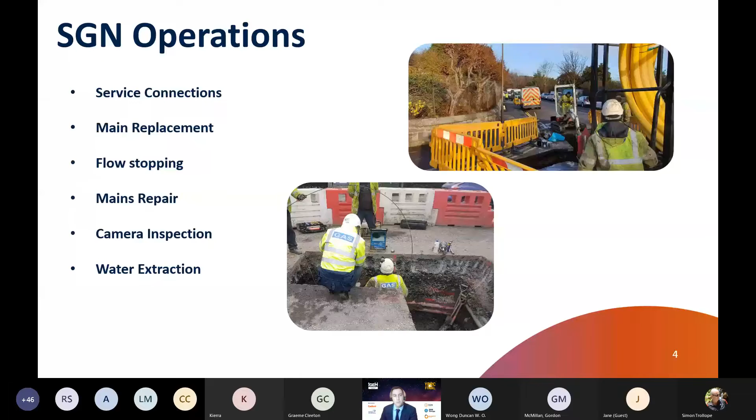Along with this obligation, SGN have targets to carry out replacement of 1,000 kilometres of metallic mains and 20,000 connections each year. What this emphasises really is the large workload that we are required to carry out and the potential disruption that it can have.

The project that I was responsible for aims to reduce this obligation and workload by making our operations more efficient, helping to minimise this disruption to customers.

In some areas this can be achieved by utilising smaller excavations, working efficiently to reduce the time spent on site, which ultimately helps to reduce our carbon footprint and emissions. Really the overarching goal here on the right is focusing on our customers while carrying out our key operations.

SGN are working on ways to reduce this disruption through innovative techniques and projects that allow for more efficient ways of working during activities such as your service connections, your mains replacement, and any repairs.

In projects like iCore, they aim to improve these efficiencies and safety on site by operating in a smaller excavation, such as the circular keyhole shown here on the right image. The project also utilises long-handled tooling for doing operations such as your service connections, which removes the operative from the excavation.

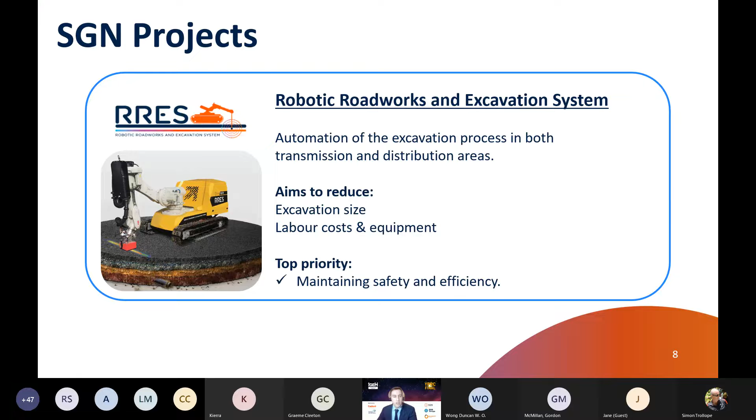Other projects such as the Robotic Roadworks and Excavation System also aim to reduce the site footprint by automating certain operational activities by utilising a robot. Both projects, these examples, aim to maintain safety and efficiency while carrying out our operations.

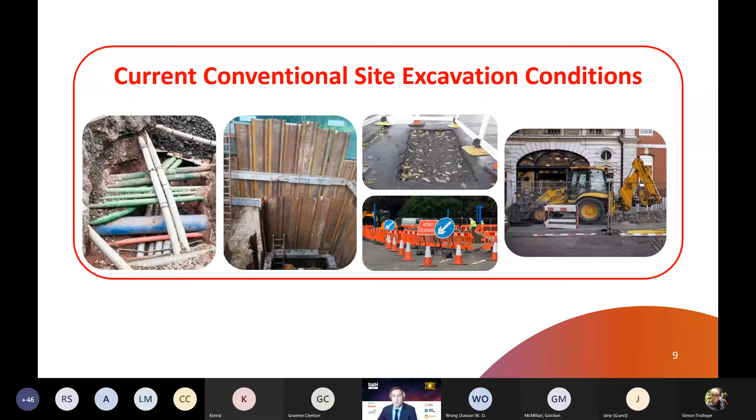This is not an issue seen just within SGN, but something experienced with all the gas, electricity, and other utility companies.

Looking at these innovation projects and techniques, they all aim to make our operations smarter and efficient by using technologies such as your long-handled tooling and utilising keyhole coring, creating a smaller and stronger excavation. One thing that clearly points out is by having no corners with these circular cutouts reduces the stress zones and likelihood of the surface excavation failing.

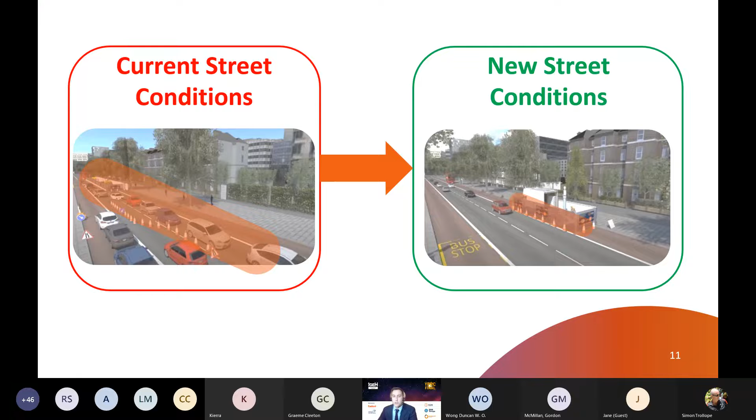In order to increase these efficiencies and reduce the site impact, the burst pack product is used during your main replacement activities when carrying out service connections to reduce the time spent on site and the size of excavation.

To give a quick overview of the service connection operations, the current metallic infrastructure within the utility industries is ageing and requires to be replaced with plastic or polyethylene pipes, or PE pipes, meaning new service connections to each property need to be made.

The first step for the service connection involves inserting your PE pipe through the live or dead metallic main, resulting in a gap or annular space being created between the differences in pipe diameters. Then the metallic main is opened, exposing the PE pipe for your service connections.

Once it's been connected and before the reinstatement can be made, the annular space must be closed. This is to prevent issues such as your soil backfilling into the annular space, which can cause the surface to slump over time, again leading to potholes and further disruption to customers. It's also required from a safety point of view to prevent gas leaks from travelling along this annular space.

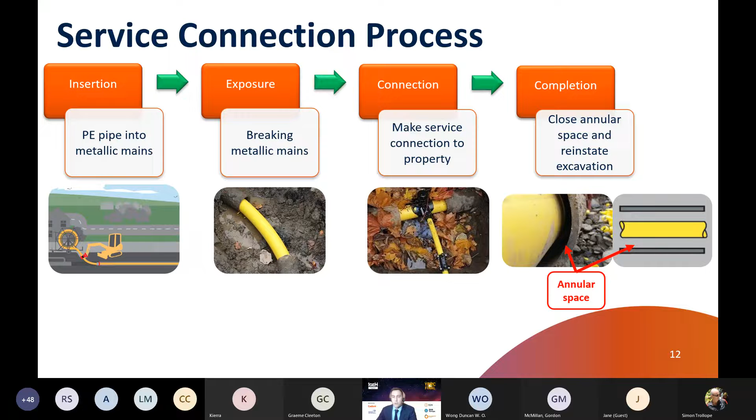The current process of sealing the annular space, typically using a foam mixture, involves preparation, mixing and then applying, whereas it is an expensive and overcomplicated process.

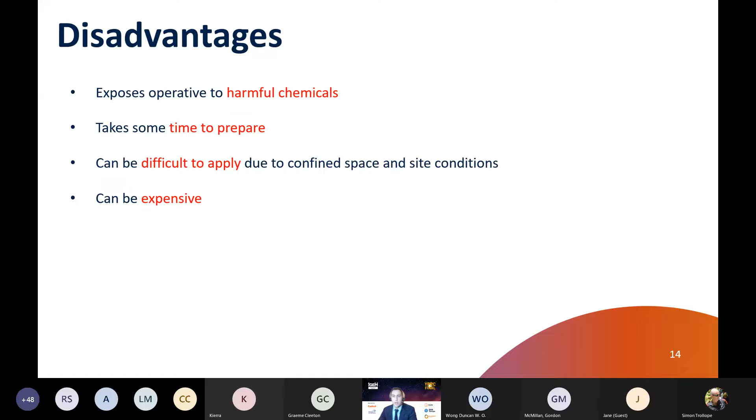So by identifying these issues with the current method, I was able to set a project problem statement here, agreeing to develop a new, safer, reduced cost and simpler method of closing the annular space.

A list of project requirements were also made with input from the operations team, such as being user-friendly, safe to handle, and at a suitable cost.

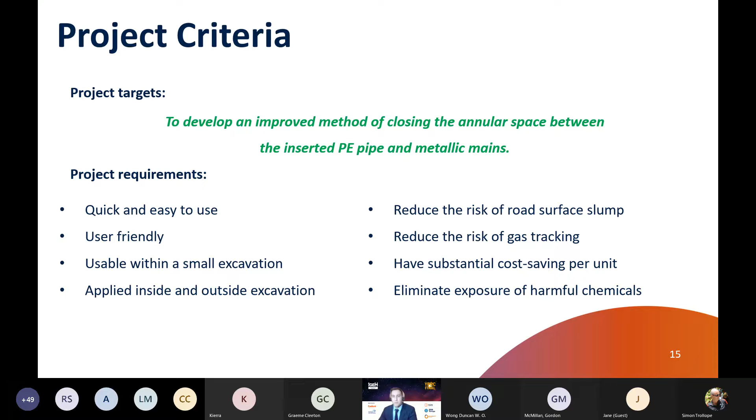At the start of the project, I attended the site with the field operatives to gain an understanding of the operations and the problems faced, as well as getting their input into the project.

I then gained an understanding of the required policies, such as SGN's mains and service laying procedures, and also industry standards such as the gas industry standards GIS LC 14, which is a specification for annular gap sealants.

So by doing this, I was able to develop a product that met both current processes and standards.

We focus these designs to be used on 1, 4, 6 and 8 inch pipelines. The user follows the same steps as before for preparing and mixing before applying by hand or long handled tooling in or outside the excavation.

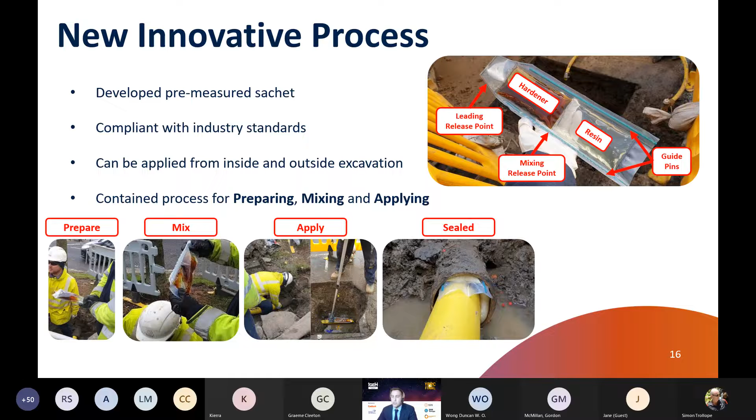Comparing this to the existing method, it's a more user-friendly design, making it safer to handle. It can be applied from outside the excavation, again making it safer by removing the operative from the excavation.

It can be applied in a reduced time, with the whole operation taking just a few minutes compared to around 20 to 30 minutes with other methods. And again, both sides of the metallic main must be applied per excavation, so you're looking at up to about an hour saving.

As mentioned earlier, the project was in partnership with Steve Vick International, who are the experts in this foam technology and helped design and develop the product.

The project lasted 12 months and was funded through Ofgem's Network Innovation Allowance funding incentive, and I'll go over this in a bit more detail towards the end of the presentation.

But the project followed the Technology Readiness Level, or TRL, scaling shown here, where earlier TRL levels of research were carried out by the project partner before we started.

So we started the project at TRL 4 and ended on 9, with focus on technology development, demonstration, and then testing and implementation, all shown by the images here on the slide.

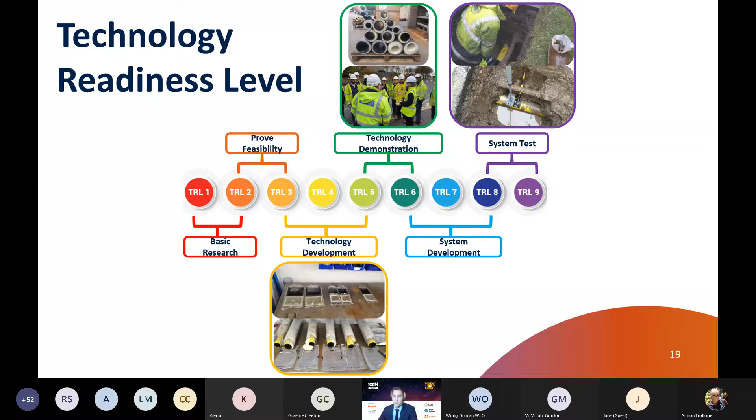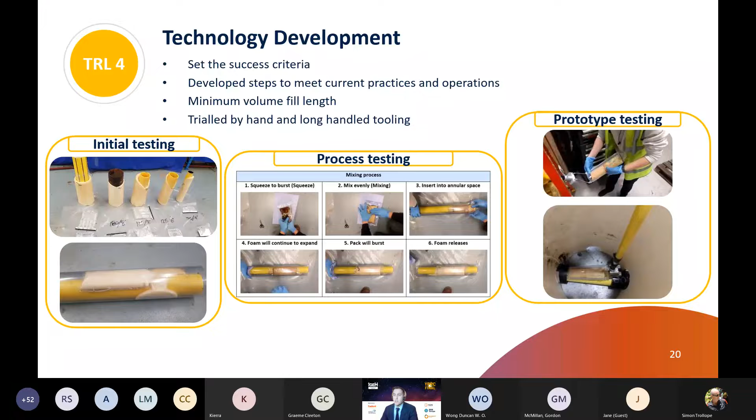So the first stage under TRL 4, technology development, involved gaining an appreciation of the task in hand and carrying out some initial tests. A few modifications were then made to find the best burst pack design that successfully met the project requirements and the problem statement outlined earlier.

Under TRL 6 demonstrations, we took the prototypes out to site to get input from the operations team, for both by hand and by long-handled tooling demonstration, where I created the appropriate documentation, such as SGN testing and risk assessments documentation for using prototypes on site.

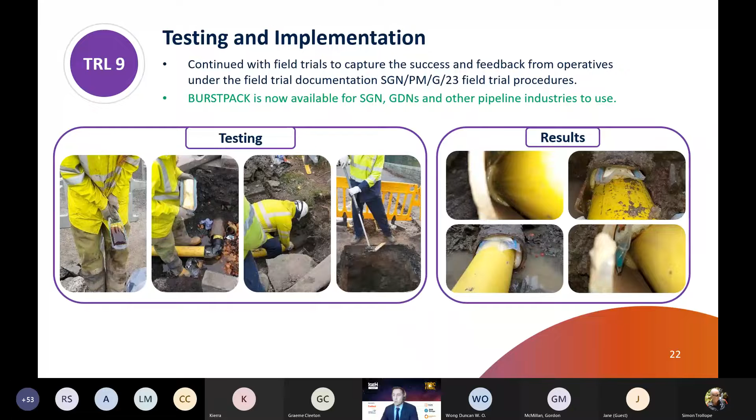After gaining feedback from the operatives, the final phase, TRL 9, involved testing of the burst pack on live operations under SGN policy documents, including the G23 document listed here, and also recording the output. Overall, the testing was all a success, with all annular spaces being sealed, as shown in the results section. The final section to this phase involved implementation, where the burst pack has now been rolled out to the wider industry by the project partners at Steve Vick International.

Feedback in general was very positive from the operatives, but they could clearly see how this addressed the problem of conventional methods, and were actually very enthusiastic about using it and getting their hands on it, because they found it was really easy to use.

Just to summarise again with this slide taken from earlier on, the project achieved the project problem statement outlined at the start, as well as the project requirements listed here, by creating a more efficient and safer system.

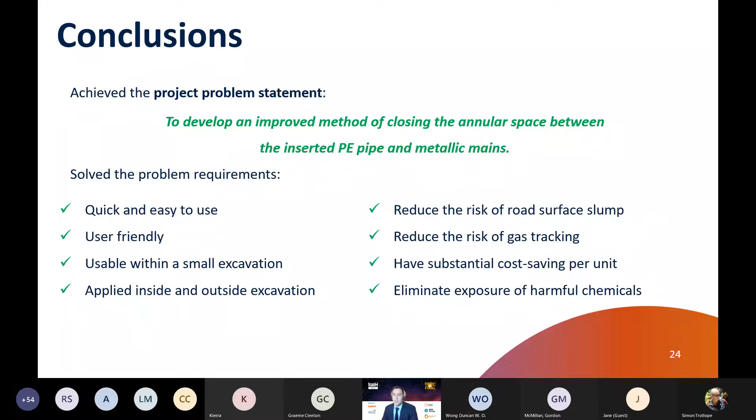So just reflecting back on the project and the skills and roles that I had to take on, and also the ones that I developed, it gave me a greater appreciation of the operational activities, in particular areas such as safety. I was also able to demonstrate project management skills, from doing admin tasks to qualifying procedures and policies, as well as evidencing the benefits and outcomes. I developed my communication skills by interacting with other disciplines internally and at Steve Vick International, and also leadership skills from steering the project and managing teams during the design and testing stage.

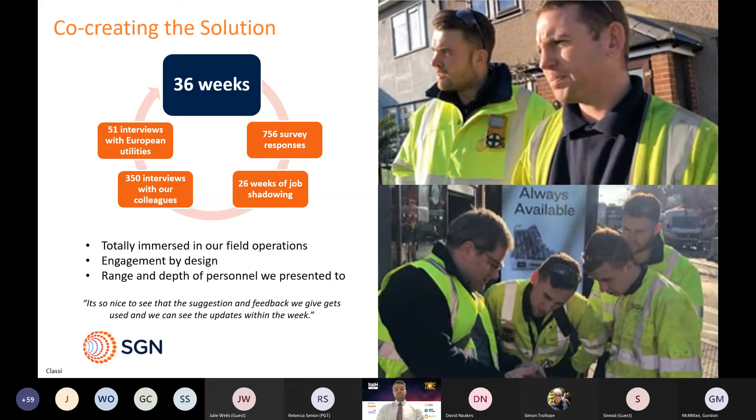So what did we build? Well, we built FYLD. FYLD is a digital application that transforms the day-to-day lives of both field engineers and managers. It allows team leaders to capture data effortlessly, giving their managers real-time visibility of site activities and actionable insights to that job. Rather than digitising a process, it's transformed it. We haven't just simply digitised the risk assessment, we've transformed it into being the initiating factor to a job that gives so many insights to a manager's day, but also support to the team.

We're using the latest technology like voice recognition systems and a machine learning algorithm that allows us to learn and predict when certain things are going to happen and informs us on similar behaviour, which I'd love to answer more questions on later. But what FYLD really does is allow our managers to make data-driven decisions in real time, to act on things before things go wrong or before an accident occurs.

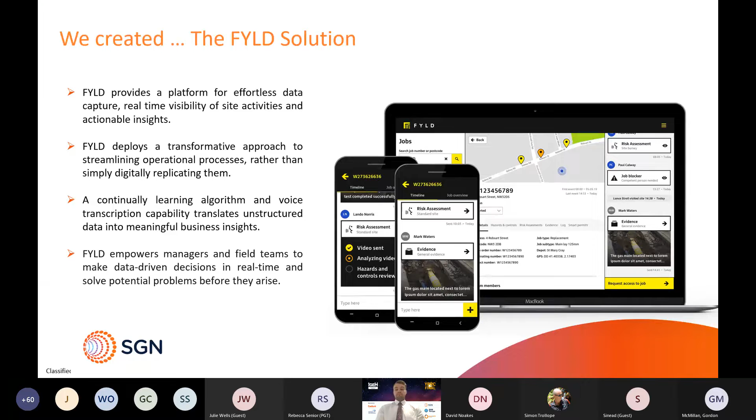I'll give you a bit of an insight into how we built it. So we leaned into that behaviour called WhatsApp, and we started with risk assessment. Because as a safety professional, I'm not having risk assessment seen as a tick box exercise, I asked the team to stop doing the paperwork, gave them a phone, and said go on WhatsApp and video your risk assessment.

And it was a bit of a shock for the team, as you can imagine. But what that allowed me to do was understand how they would articulate a risk assessment. I would then sit, look at the video, type in the hazards and controls, and send it back to them to ask if I captured their risks and hazards appropriately. And that was the basis of our application.

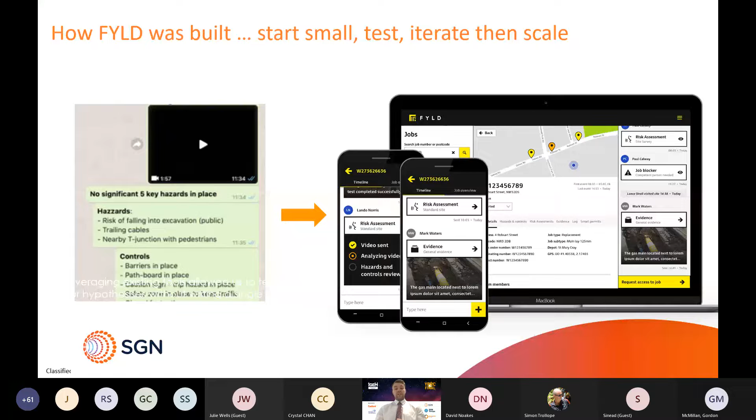So that's an example of a lean test we did with the 4 team leaders I chose and the team manager working on that experiment. That allowed us to understand what insights this gives the team manager, and what insights it gives us as a safety team, as a policy team. So not only can we understand the policy gaps, but also where we need training, the change management strategy, and support for the teams to make better quality videos.

So where did I lead? I'll talk about COVID in a moment, but stakeholders was where I had the fun, and what I want to call out today. I had the opportunity to present the case to our shareholders, which is like going into the dragon's den, to be honest, which is a rare occurrence. Some of our exec don't even get to go and present there. And I was asked to present the case of why they should invest in the product we were building.

And the benefits it would give. So I could voice the concerns of the workforce and the challenges they faced, but I could also speak from experience. And I could articulate that in such a way that spoke to the seniority of how the business would benefit from this application. It was a great defining moment and gave me a great confidence boost for the rest of the project, as I had to present to them again thereafter. But I was going there for the vision I had, and fulfilled, but also for the impact it'd have on my colleagues on the front line.

The other set of stakeholders I want to mention, that some of you in the audience would know all too well, is the HSE. Because we were encroaching on something as fundamental as risk assessment, I wanted to make sure they were brought along for the journey. So I spoke to my local inspector to say, look, I want to present you what we're working on.

And he asked me to present to his executive team at the HSE and the principal inspector, because they themselves were setting their own strategy about how they were going to keep pace with emerging technologies from a regulation perspective. And for those of you that know the HSE, they're not going to ever say that you're 100% right or doing things perfectly, but they will definitely say things if you're off piste.

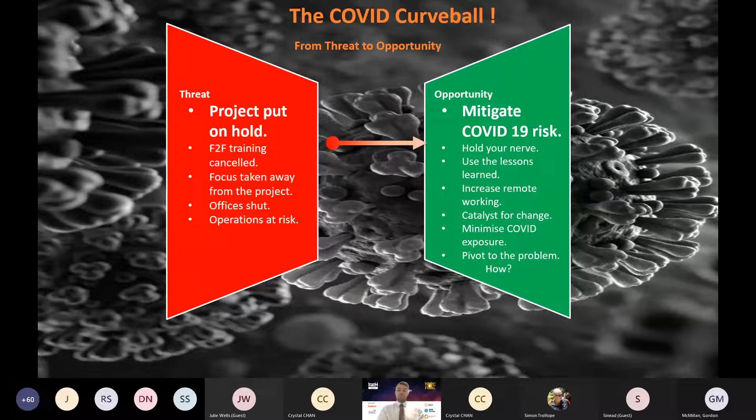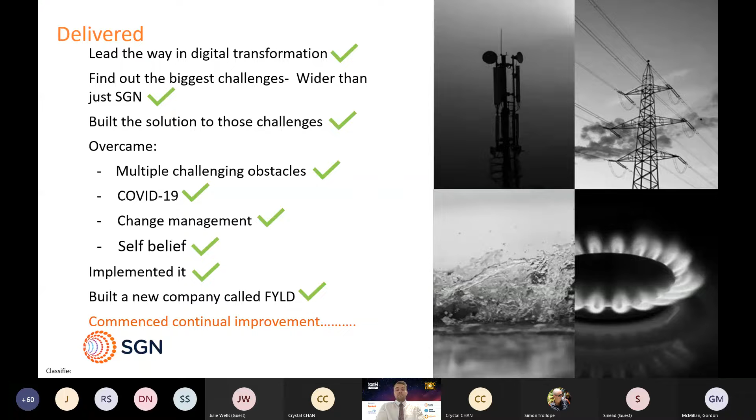What did I deliver? Absolutely leading the way in digital transformation. Built benefits wider than just SGN. We overcame those challenges from the workforce and team manager's perspective. I overcame multiple challenges — COVID-19, change management, self-belief that I had in myself. We implemented it, and not only that, we've built a company out of it that's launching to other utilities around the world, allowing us to commence on this cycle of continual improvement.

So I started off my presentation asking what it takes to drive digital transformation, and talked about all those benefits. It takes collaboration, it takes working differently, and certainly thinking differently. I just want to leave you with what I've written in my paper about what I believe is the critical factor to digital transformation. And it's easy — it's your greatest asset, which is your people.

Our leadership team absolutely believed in our people, by believing in me, and me believing in our workforce. And know that if you can get the buy-in, if you can get the vision and the desire to change, with the right tool to enable it, your workforce will transform your business and lead to all of those beneficial gains. FYLD has been built by the workforce for the workforce.

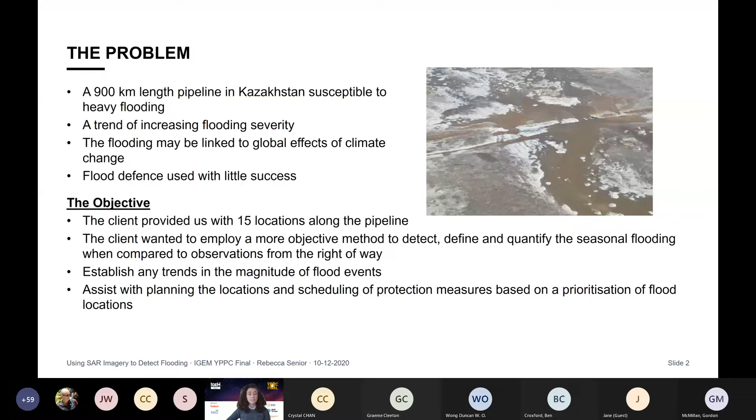The objective of this project was to employ a method that could be used to detect, define and quantify seasonal flooding and establish any trends in the magnitude of flooding events. This would ultimately assist with the planning of locations and scheduling of protection methods. The method used to satisfy the objective was SAR imagery, as the title states, and I'll go into more detail later about SAR - this is a radio wave technique used to measure the backscatter and reflectivity of objects on the ground.

So why is flooding a problem? Flooding can threaten the integrity of a pipeline and any associated infrastructure. I've listed a few hazards here, such as scour, erosion, and encroachment on the pipeline, and these are just a few of the ways the pipeline can be affected. As we can see in the aerial imagery on the right of the screen, this shows the damage to a bridge and right-of-way access road. This pipeline runs parallel to this road and is situated just north of it, so any damage that has happened to the road by flooding means that water has already crossed the pipeline.

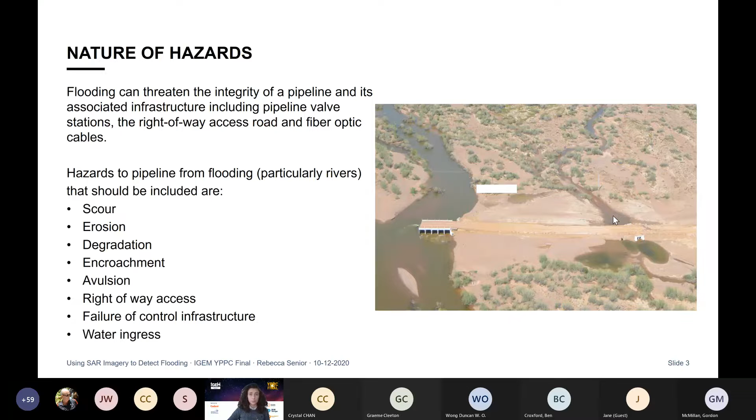This exposed pipeline can then be partially reburied by sediment, and this can potentially cause failure. Exposure also makes the pipeline more vulnerable to third-party damage.

This project was split into 3 main tasks, and all of the work I'm going to discuss is work that I carried out. The first task was a data review, the second was flood monitoring and reporting, and the third involved a 90-page final technical report containing evaluation of the pipeline and recommendations.

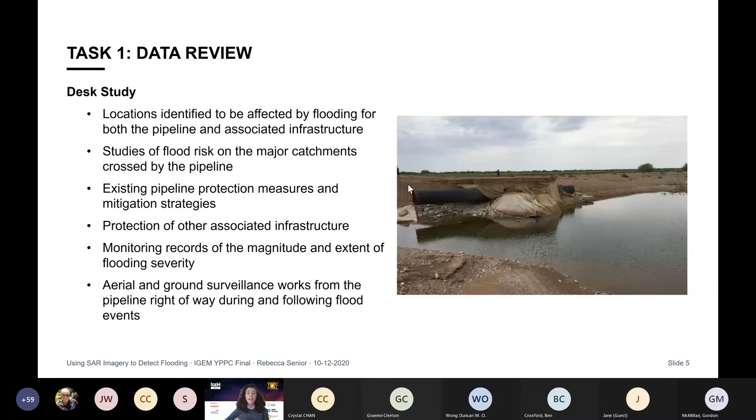This included photos that had been taken along the right-of-way, and the image shown on the right of the slide here shows damage to a right-of-way access road and culvert. From task 1, I wrote a technical report where I provided an overview of the pipeline and any additional data required to complete task 2 and task 3.

To fully introduce what SAR imagery is now, this was the start of task 2, where I began to look into ways of performing the analysis. As I mentioned, SAR is a radio wave used to measure the backscatter and reflectivity of objects on the ground.

The European Space Agency, the ESA, allows SAR imagery to be obtained free of charge, and the satellites have a retrieval occurrence of between 6 and 12 days. So you know that the data you're receiving is recent in comparison with other data. It also has the benefit of being retrievable regardless of time of day or weather.

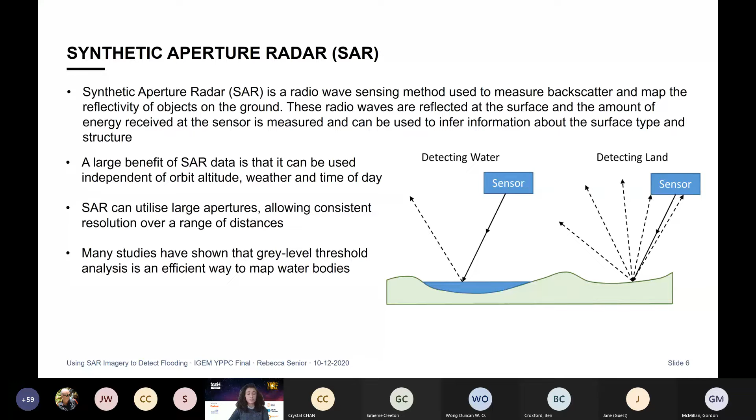The solution was to employ SAR imagery and remote sensing techniques to detect flooding along the pipeline right of way. Water has a low backscatter and wavelength measured by SAR, and this allowed me to map the water bodies.

This then leads me to task 2 of the project, and this was arguably the largest part of the project as it was split up into 4 different steps. It was all a learning experience as I didn't know how to do this analysis beforehand.

The first step was the development of remote sensing methods. This included doing research and reading journals to develop a methodology for the outcome the client wanted. Step 2 was then applying these remote sensing methods and learning how to use new software that would allow me to analyze large satellite data sets.

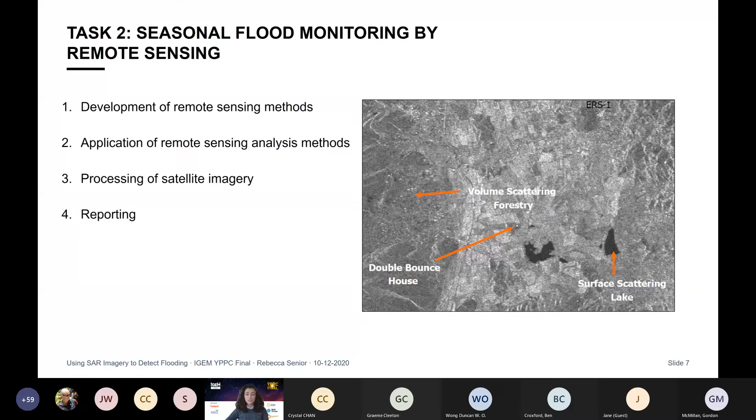The third step was then to actually process the satellite imagery, starting with a raw data image to produce a vector plot that could be viewed in ArcGIS. The final step was the reporting stage, where a total of 8 reports were produced for 24 flood areas.

The SAR imagery was analysed in an application called SNAP, which is provided free by the ESA, and the data used was obtained from Sentinel-1A and 1B satellites. I used a model builder to develop an optimum analytical process, and this contains many rigorous pre-processing techniques.

I'll now show you what a raw and processed plot looks like. This is a raw SAR image on the left of the screen, displaying the section of pipe in red. On the right-hand side, we have a fully processed vector plot, which has gone through the steps shown in the previous slide, and you can see the flooding in blue affecting the right-of-way.

As you can see in the image on the right, there's a build-up of floodwater against the pipeline embankment and a breach of the right-of-way access road. At this location, a culvert was destroyed, which put a lot of pressure on the embankment where the pipeline is, and this can cause loading.

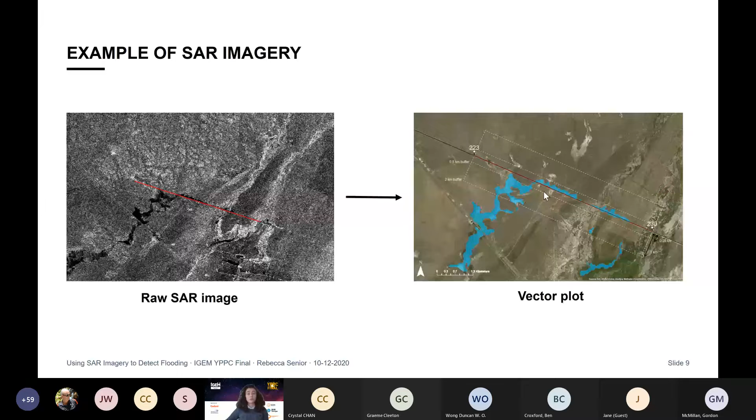An assessment criteria was then developed to be able to quantitatively measure the flooding surrounding the pipeline. Criterion 1 measures the length of flooding along the pipeline, which is the most important and the one the client was most interested in. Criterion 2 shows the flooding within a 0.5 kilometre area, and criterion 3 shows the flooding within a 2 kilometre wide area.

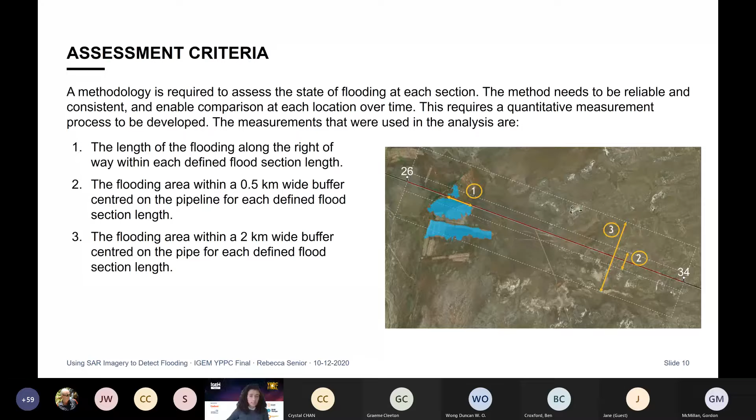The main reason for using this quantitative approach was that when the analysis is performed again next year, or if you wanted to look at it historically, this approach means it can then be compared.

A total of 192 maps were produced during this task. This leads me to task 3, which was a technical report to summarise the findings from task 2 and an evaluation of each section individually. The report included determining the peak flood at each location, recommendations on how to protect the pipeline from hazards present, a review of embankment design, and current flood defence measures. So task 3 considered and evaluated the task 2 results and provided recommendations for the client, basically saying: here are your problem areas and how they can be solved or mitigated.

I've identified a few different ways in which I would improve this process. Firstly, I'd use commercial data, as this would increase the survey frequency. Flooding can rise and fall very quickly, and for a big event you would expect maybe around a 3-week timeline. So once you identify when the peak flood is, you can analyse SAR imagery every 3 days, for example, and this will result in a clearly defined flood development and recession curve that identifies the date of flood onset and time to maximum flood.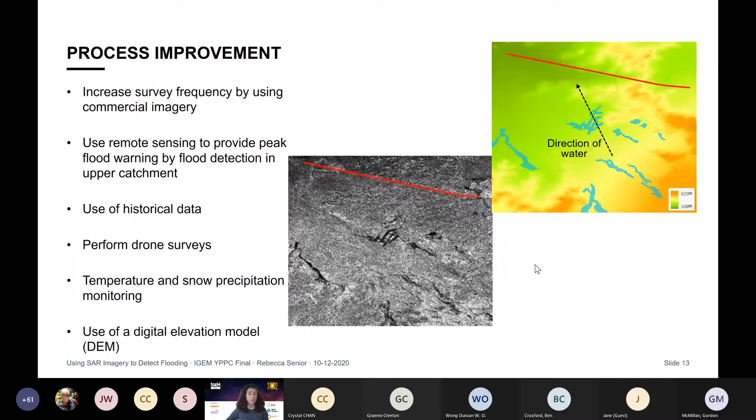Some of the further work and recommendations to the client is to perform a yearly review of flooding along this pipeline and along another one of the operator's pipelines, which I'll be completing next year. It's also recommended that the condition of the pipeline be assessed from the inline inspection data to determine whether there's been any loading introduced due to the passage of floodwater, and if the pipeline had suffered displacement as a result.

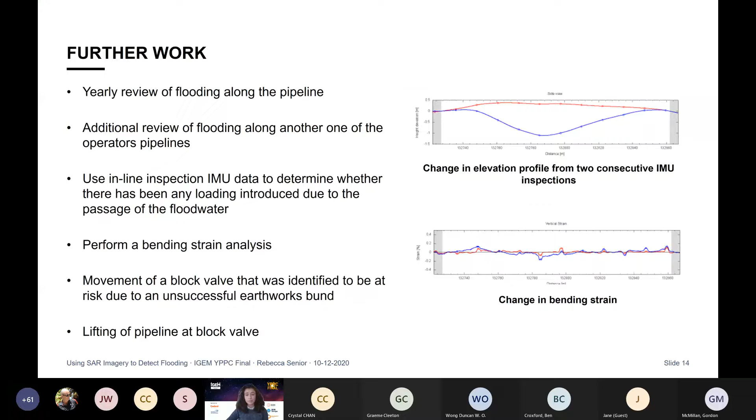So what was achieved? Well, during the project, a proven methodology has been developed to identify flooding from satellite imagery using remote sensing methods. Ultimately, the client was happy with the findings and solutions provided in all 3 tasks. The works allowed the operator to have a better understanding of flooding across the pipeline and significantly reduce the risk of a flooding event at any given location, due to the scheduling and protection measures being implemented based on this risk prioritization.

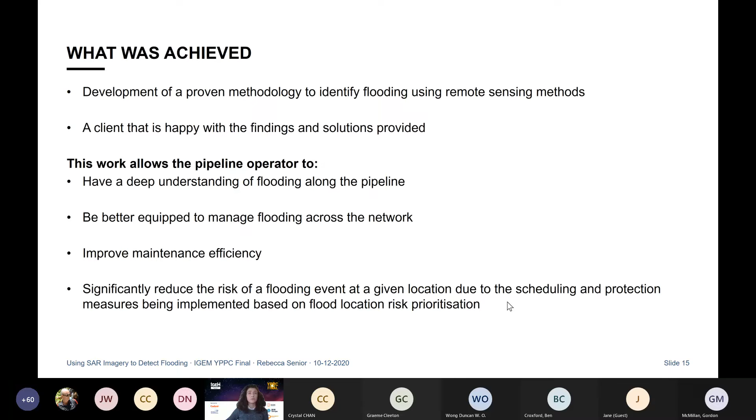In terms of personal achievement, I really enjoyed this project. It was a large project that I was lucky enough to have a lot of input over, and I completed it shortly after graduating, so I feel like this has tested a lot of the skills I've learned at university, and I've been able to apply these and provide solutions and continue to improve and develop as an engineer. So what does this mean for the gas industry? Well, a new methodology has been developed, and this can apply to many networks globally. For example, the method could be applied to any UK network, and this will be particularly important in upcoming years with the growing concern of climate change.

As I'm sure you're all aware, flooding can be an issue globally and can impact assets, including damage to pipelines, particularly exposed crossings and above ground installations, which can ultimately result in loss of supply and generating operational issues and additional expense. Remote sensing has a number of advantages, including data collection from remote or difficult to access areas, particularly with the ongoing COVID-19 crisis.

As satellite imagery improves and becomes more easily accessible, the flooding work could be expanded to improve remote sensing techniques in the pipeline industry. This could be used as a geotechnical review of a network to identify and prioritize locations under threat, allowing prioritization to be desk-based and determine a top, say 1 to 5%, of the network that would then need to be investigated in field.

This includes specific geohazards such as landslide monitoring. For example, if there was a land instability and a heavy rainfall event occurred, by using SAR and InSAR imagery, which combines two SAR images, this can be used to determine changes in land surface. You can then compare these images before and after the event and determine whether monitoring or further investigation needs to take place, and link this to the movement of the landslide mechanism and how this will affect the pipeline. This is something I'm looking at currently in my MSc dissertation.

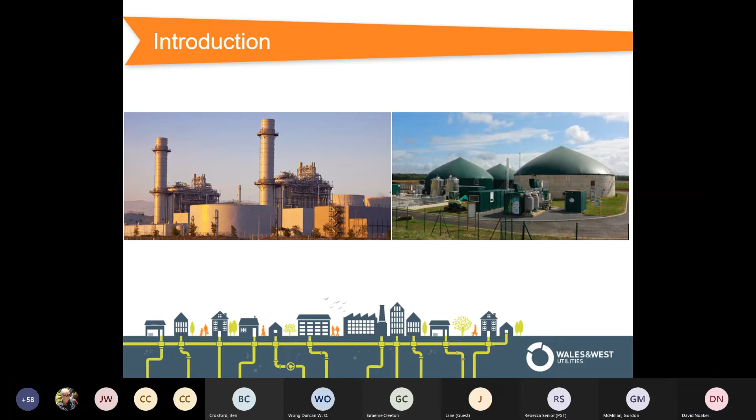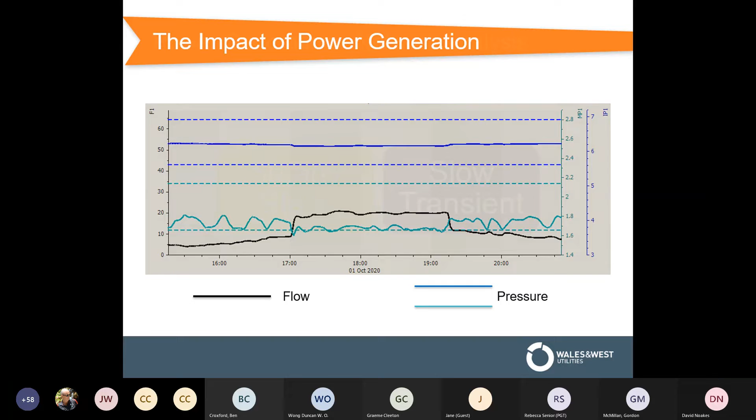Generally, for analysis requests, we have two modes of analysis. Steady state analysis, which we use on our below 7 bar models to determine whether the new load is acceptable during peak demand. And also slow transient analysis, which we use on our above 7 bar models, just to check whether our storage capabilities are sufficient to meet this new demand.

Just a quick note on this, power generation has also had a big effect on our storage, to the point where systems which previously had a huge surplus in storage are now in deficit or close to being. So we introduced a peak day percentage NExA to ensure these sites can operate normally, but only to a specified demand level. Once past this level, the site must run at a flat rate to avoid storage issues. Going back to our processes then, a major change in the way in which we conduct analysis for these fast ramping power gen sites is the introduction of fast transient analysis.

This type of analysis allows us to examine the ramp rates of power gen sites more closely as they switch on and off.

So what do we need to conduct fast transient analysis? Just a couple of pieces of information from the customer is needed, aside from the hourly flow. Firstly, the gas meter or site location, so we can determine the distance between the connection point and the site, and in turn work out the new main and service lengths. The toolbox program is then used to calculate the minimum allowable diameter of the pipes leading to the connection point, from the connection point to the site. Using toolbox ensures that

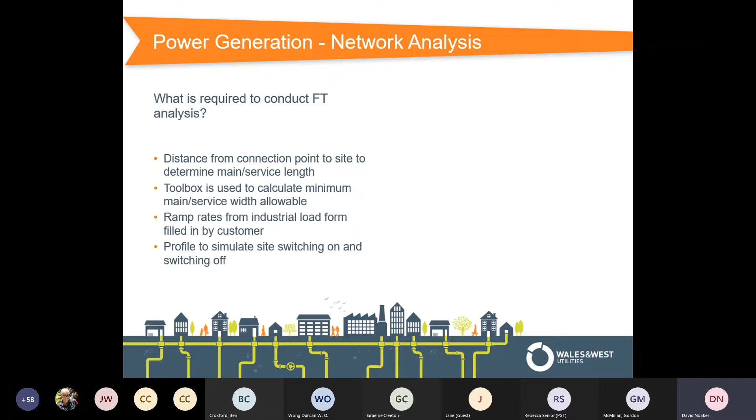Lastly, what we need from the customer is the ramp rate of the site, which is given to us via an industrial load form. From this, we can create a profile to simulate the site switching on and switching off. This is just a snippet of our SynerGEE model, just to show you how the site will look as it's set up on SynerGEE just before its fast transient run.

We are looking to ensure there are no pressure spikes during these two scenarios that take the pressure over or below the allowable limits of the upstream network. To ensure we are fully covered for all scenarios, we use this profile both at peak demand and at summer night demand, which we analyze at 5% temperature sensitive and 30% industrial demand. We do this because pressures are higher in the summer, and therefore we need to see if the pressure spikes above the peak level operating limit of the network during an emergency switch off.

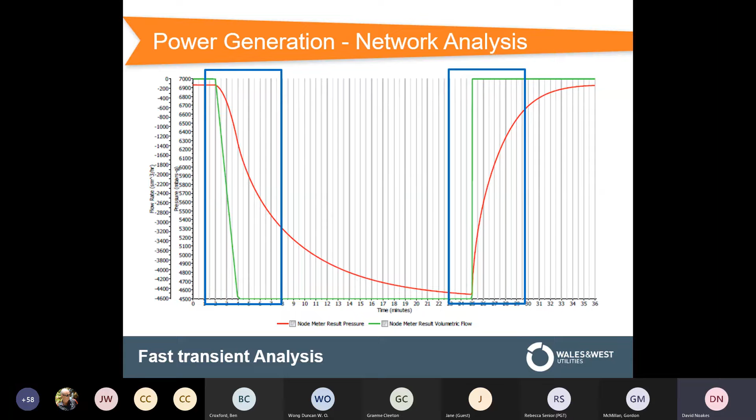Turning our heads to biomethane now, the impact of biomethane. Whereas for most inquiries, we are interested in what happens during peak demand, for biomethane requests, we are looking to see how the biomethane site reacts during low demand periods and if they can export their requested amount all year long. In an ideal world, the biosite would be able to run at a continuous flat rate without any disruption. However, this is not always the case.

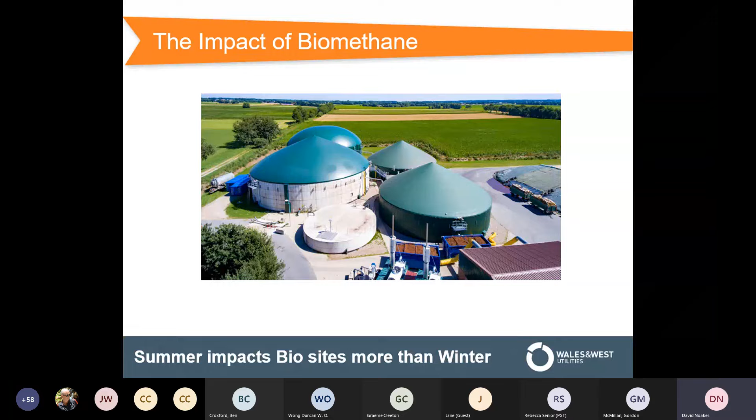So what do we need to conduct our biomethane analysis? Similarly with the power gen, we need to know the distance from the site to the nearest connection point on our network. We can then again work out from this the size of the new main, which with the help of the toolbox program, and lastly, we just need the requested export amount from the customer via an application form.

Let's have a look at an example then using our actual flow data from our SCADA system. Say if the customer wanted to export 500 standard cubic meters of biomethane into our network, then it would not be possible during low demand periods.

However, it's not just as simple as just looking at actual flow data and making a call on how much the customer can export. There could be more than one site feeding into the same network, and also we don't know how the biosite will react with the other feeds once it has connected.

That is why I use modeled data and flow data together to come up with a true export rate. The way we do this is by sticking the biosite onto the model, like I showed you on the previous slide, switch it on pressure control at the MOP of the system, and scale the model down in increments as shown here on the next slide.

This is just an example of the increments used, but you can use as many as you like. The industrial scale does not match the non-industrials, just because in reality, the industrials wouldn't see the same proportional decrease in demand the same way as a house or flat does.

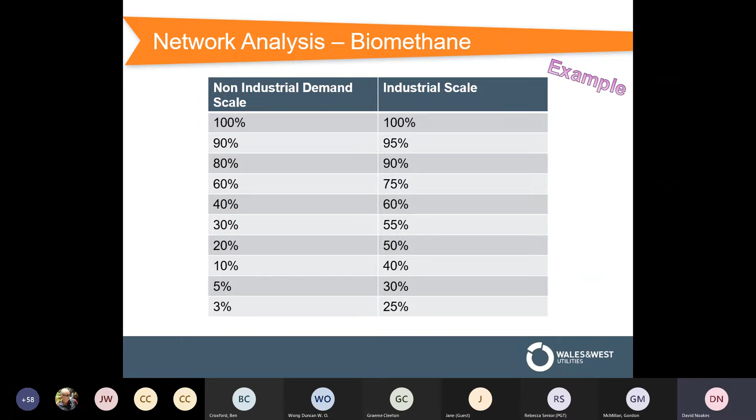We can then incorporate this into our flow data to show us exactly what the biosite would have been doing if it had been connected for the past year. This, of course, is just a snippet of the results and not the entire story, but we are interested in the available capacity column, which shows us basically every hour's data for the past year and shows us how the site would have reacted. These results can then produce the following graphs, which then go into the design study, which is sent to the customer.

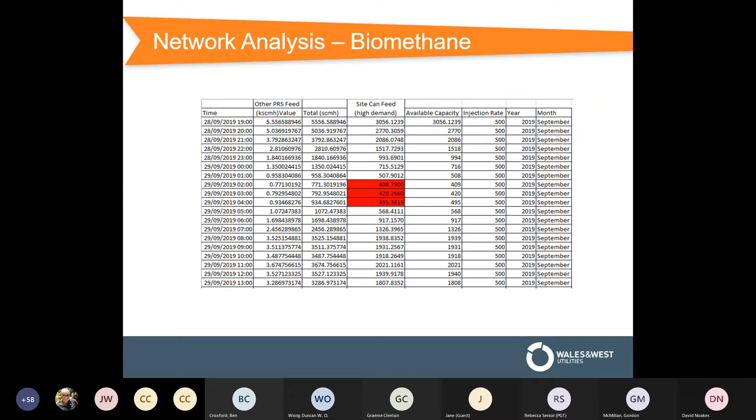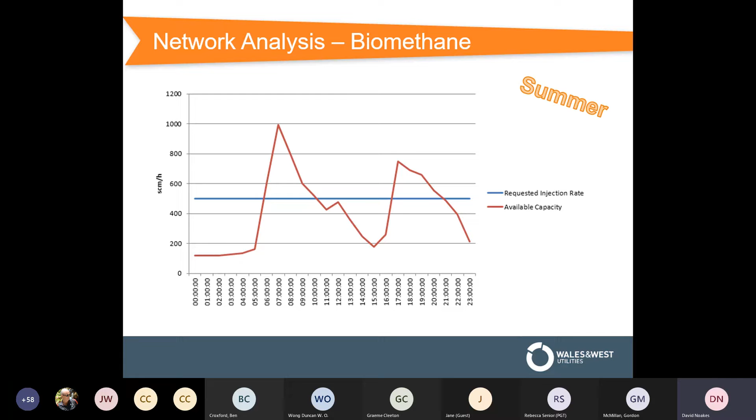All of these amounts are broken down in a capacity study for the customer to see how the results were obtained. Once the site is connected, we will continue to monitor the site to ensure that the analysis we have conducted is working as predicted. And although this presentation talks about biomethane analysis, this could actually be extended to green gas inquiries in general, as the same logic still applies.

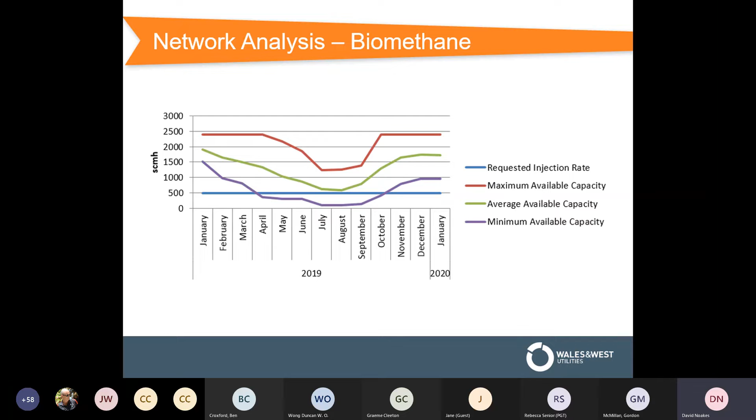Looking to the future, whilst we are always looking to improve our power gen and biomethane analysis and share our best practices, we're always looking further ahead to be ahead of the game. With the 2050 net zero target, Wales and West Utilities and the gas industry as a whole needs to adapt and contribute towards this goal. One way we can do this, along with the predicted uptake in biomethane, is the introduction of hydrogen. Hydrogen blending will provide a huge challenge for analysis, and it's vitally important that we are satisfied with the results and ensure all scenarios are covered before implementation.

If, as I mentioned before, we're expecting to see an increase in the amount of biomethane sites, then we will need to look into ways to help green gas export into our network. One of the ways being explored is through the OptiNet project, which Wales and West have been working on alongside Cadent and PassivSystems. The purpose of this project is to explore different ways to optimize gas network applications, such as smart pressure control, compression to higher pressure tiers, and storage solutions at times of low demand. The smart pressure control trial is currently being set up on the Wales and West network, and if successful, it could then be implemented elsewhere.

Finally, another branch of analysis we've not experienced before until recently is unregulated demand. Since this demand is unregulated, the site will take gas depending on what the network pressure is at the time. We've already consulted with customers and other DNs across the UK to workshop the analysis process for this type of request. It's expected we'll get more of these inquiries, so it's important to shore up our processes early.

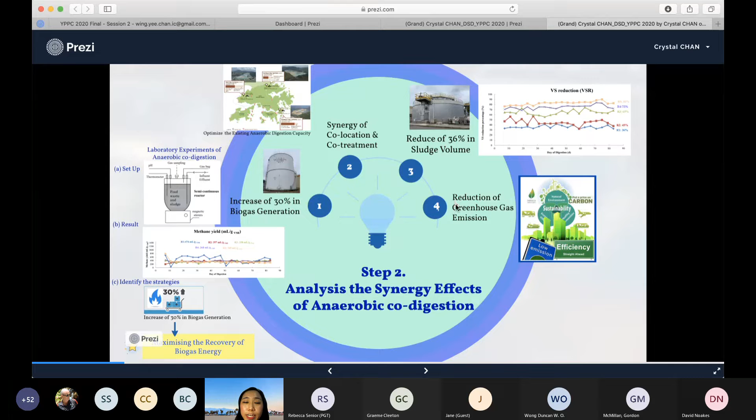Therefore, feasibility studies of anaerobic co-digestion by the DSD at the laboratory test have been carried out, and the results show a synergy effect of a significant increase of 30% of biogas. In these studies, we are going to identify strategies to maximize the recovery of biogas energy. Apart from the 30% increase in biogas generation, synergies of co-location as well as co-treatment, reductions in sludge volume, and greenhouse gas emissions are the major advantages of using anaerobic co-digestion.

The third step is that we need to understand the current situation about biogas usage. To enhance biogas utilization, the Drainage Services Department is currently using combined heat and power as well as microturbines to generate electricity as well as heat. From our study, we found there is a major problem because of the low utilization of thermal efficiency.

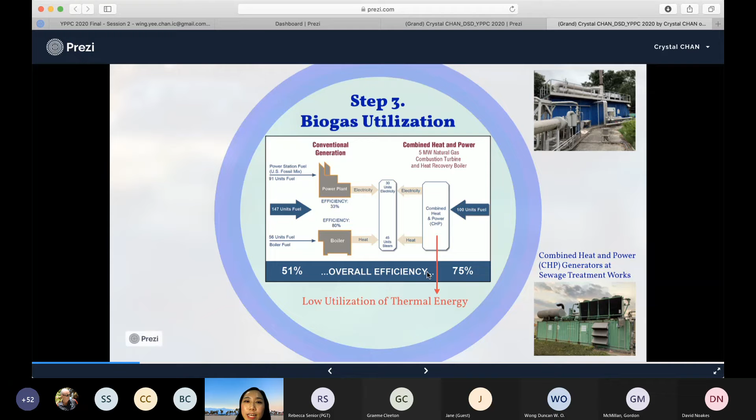So that's why we come to our main part, which is that we need to construct a very strategic framework for biogas utilization. In order to enhance biogas utilization and the economic performance of the CHP system, I propose a strategic framework for conducting a study to identify improvements as well as explore other feasible solutions.

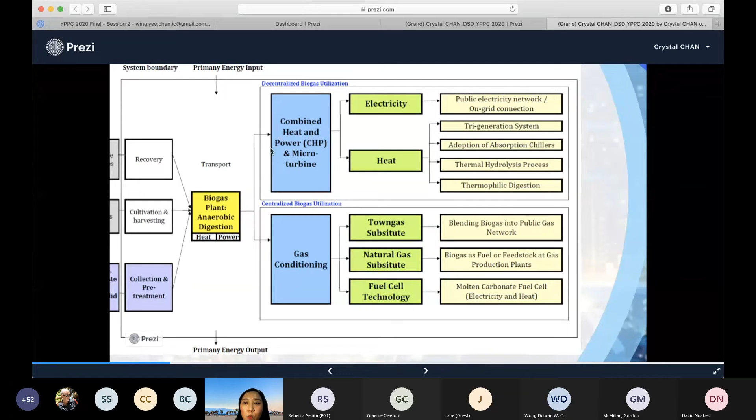Combined heat and power microturbine is the first strategy, while the second one is gas conditioning. So we'll go through them one by one. In terms of combined heat and power as well as microturbine, electricity efficiency as well as thermal efficiency will come up with the total energy efficiency.

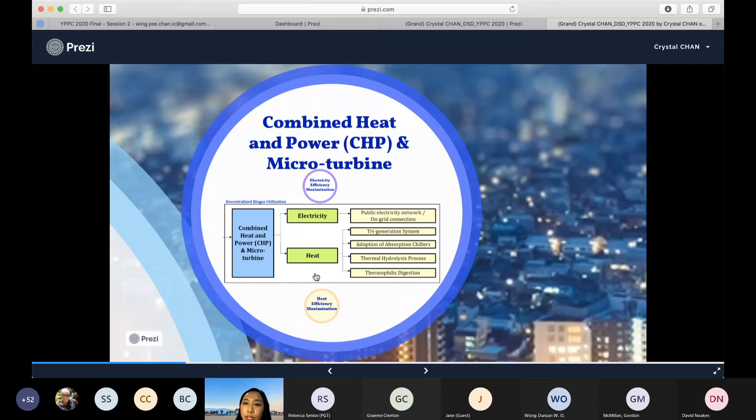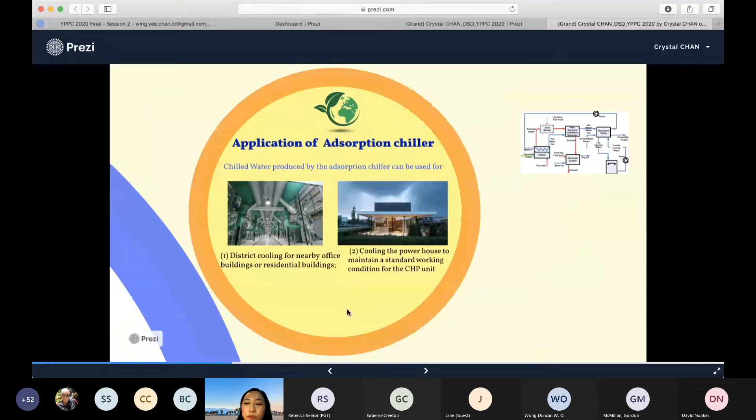In order to enhance heat efficiency maximization, we need to construct this using two methods. The first one is about trigeneration and the adoption of an absorption chiller. In order to enhance biogas utilization efficiency as well as balance the thermal load, we have applied a retrofitting scheme to the existing trigeneration system.

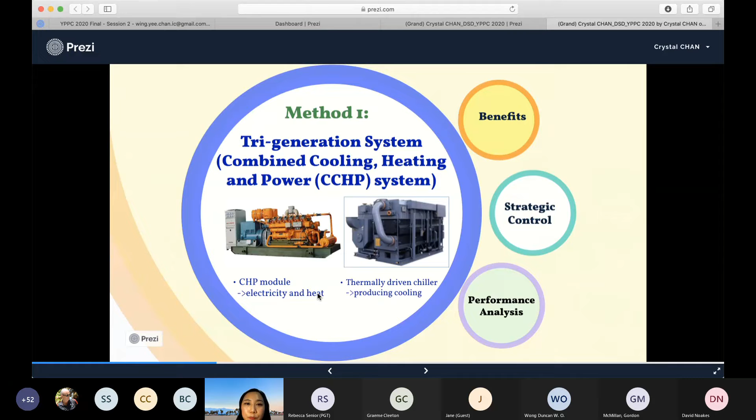You may wonder what trigeneration is. Indeed, it is a combination of CHP modules as well as thermal-driven chillers, named the combined cooling, heating, and power system. Energy saving as well as emissions reduction are the main benefits of the trigeneration system.

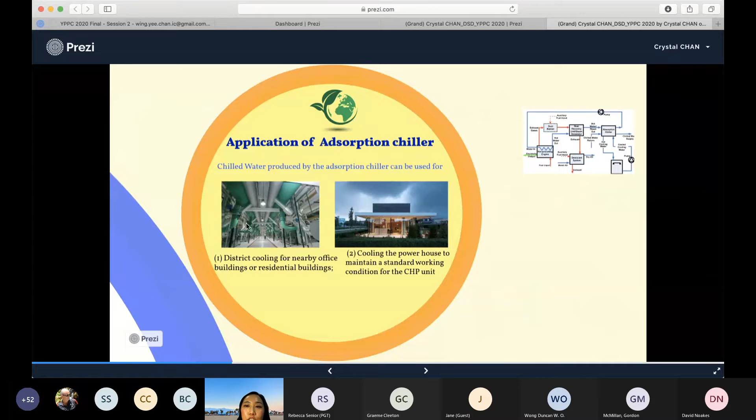The chilled water produced can be used for the district cooling system, or it can supply the powerhouse for cooling. To satisfy different cooling as well as heating demands in different sections, strategic controls of trigeneration are adopted for capturing thermal energy from the CHP.

For example, in summer, chilled water is used to cool the exhaust gas as well as the jacket hot water, while in winter, digester heating is given high priority, and surplus wastewater is used for cooling. So in this kind of study, we learn not just the technical side, but also the project management side, which can benefit both aspects.

And here comes the performance analysis.

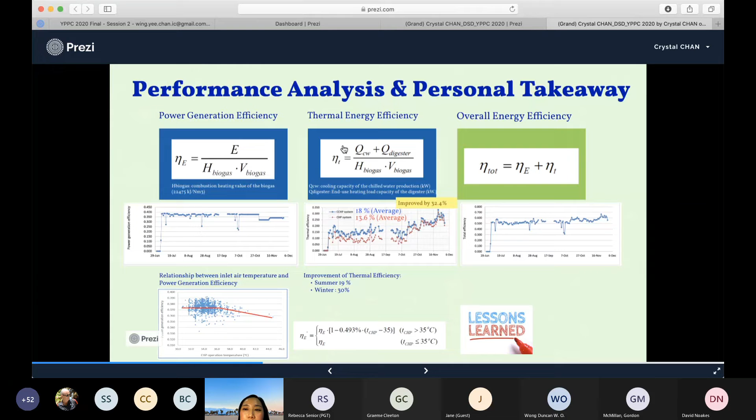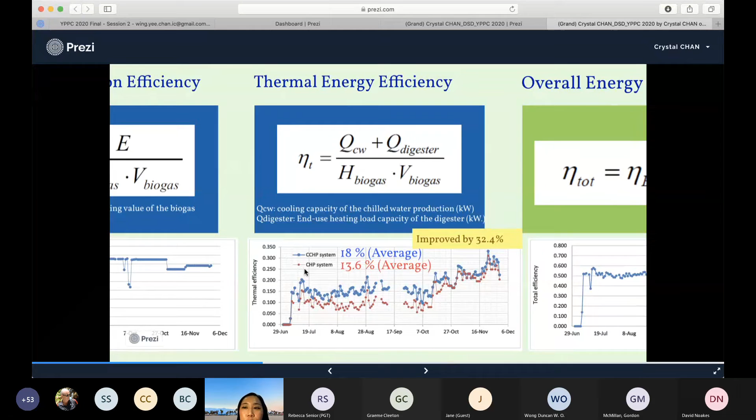The result shows that the overall energy efficiency is equal to the power generation efficiency plus the thermal energy efficiency. From the study result, we can show that the combined cooling, heat and power has an average of 18%, while the traditional combined heat and power is only 13.6%. So there is an increase of about 32.4%, which is a really good outcome.

Method 2 is about thermophilic digestion as well as thermal hydrolysis process. Anaerobic digestion is limited by the hydrolysis stage, so to maximize the utilization of heat and electricity, thermal hydrolysis as well as thermophilic digestion are introduced. If the heat loading is enough, we can use thermal hydrolysis as a pretreatment for mesophilic digestion, so that we can increase the biogas yield as well as electricity production, and further reduce the sludge solid volume. If the heat loading is massive in size, we can use thermophilic digestion with a temperature over 55 degrees Celsius to replace mesophilic digestion, so we can further generate more biogas yield as well as electricity production.

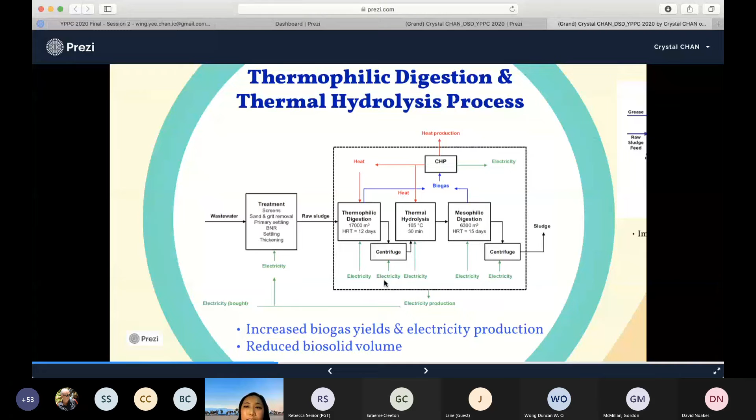After sharing some strategies for maximizing the thermal efficiency, we can also introduce strategies for enhancing the electrical efficiency. On-grid connection for the CHP generation system is one of the solutions. According to the agreement with the power supply company, China Light and Power Company, power generated by CHP as well as micro turbine is fed directly into the electrical switchboard for the water heater house, for further supply to electrical appliances like the fan or ventilation. So the reliability of the electricity supply is further increased.

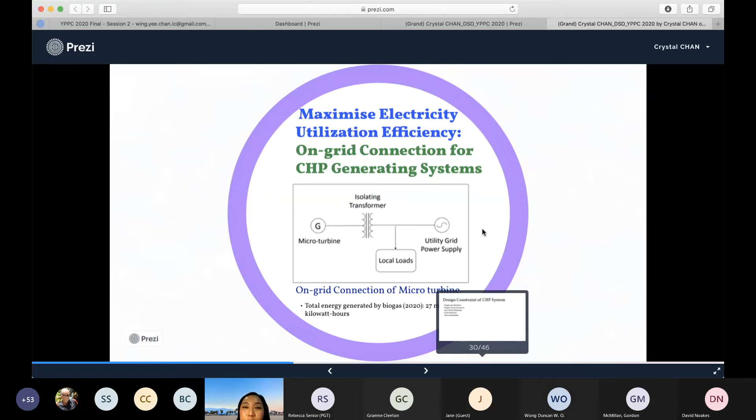Apart from combined heat and power as well as micro turbine, the second strategy I've proposed is about gas conditioning. Upgrading the biogas to biomethane and injecting it into the natural gas network is an efficient way of integrating biogas into the energy sector. Biomethane can then be used as a substitute for natural gas. So we can study this one by one.

The first option is to blend the biogas into the gas network directly for supply to the gas customers. The biogas generated at the sewage treatment works could be blended into the gas network directly for the supply of gas customers. The study shows that there is an 87% efficiency, but it also depends on the energy source itself.

The second option is to use the biogas as fuel as well as feedstock for the gas production plant, and the efficiency can reach 90%, depending also on location. The final one is about fuel cell technologies. The efficiency can reach 90%, with a breakdown of 50% electrical and 40% thermal efficiency. A major advantage is that it will have a low economic impact.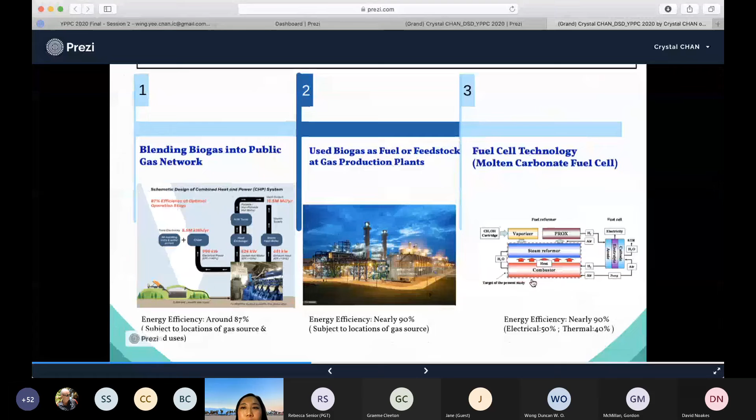Apart from formulating the strategic framework of biogas utilization, I've also successfully identified a strategic decision matrix, using a framework including the economic, environmental, as well as technical side, for making decisions in the short term as well as in the long term.

However, apart from the technical side about energy efficiency, we also still need to consider the economic as well as environmental aspects. Combined heat and power and micro turbine will have a very high economic, capital, as well as maintenance cost, and it would generate nitrogen oxides as well as fine particles.

So in the long term, we're going to introduce different strategies, that is the gas conditioning strategy. We can see that on the technical side, energy efficiency can go up to 90%, with no capital or maintenance cost, and low emissions of air pollutants. But the major concern is that we need to care about the location of the gas sources. So we mostly apply gas purification when the sewage treatment works is near the gas production plant, so that the distance for transforming the biogas into the network will be much shorter.

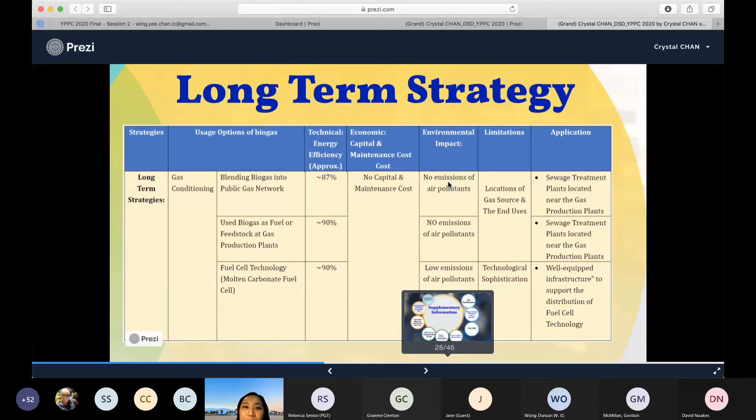So here is the short-term as well as long-term strategies. Apart from anaerobic digestion, Drainage Services Department also has other feasible options, like new technologies to boost biogas generation.

Ultrasonic pretreatment of sludge for anaerobic digestion is one feasible solution. It's an effective mechanical pretreatment method on surplus activated sludge to boost biogas production, because it can further break down the bacteria into smaller pieces and increase biodegradability.

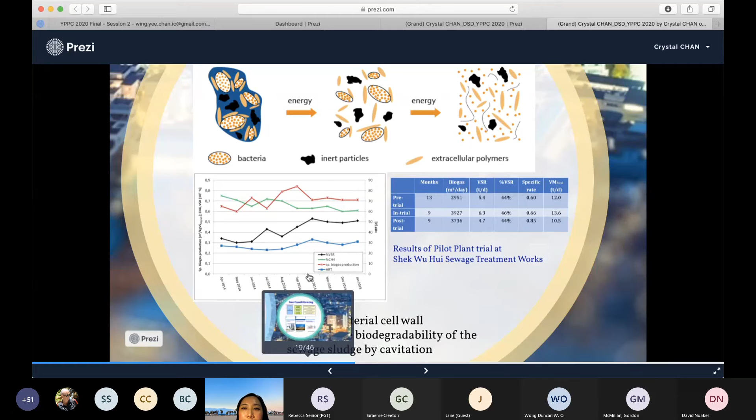As we can see in the result, the left-hand figure shows that biogas production rate is increasing. The right-hand corner shows that the biogas production rate before the pretreatment is around 3,000 m³ per day, but after applying the ultrasonic pretreatment, it increases to nearly 4,000 m³ per day. This is a really amazing result in our sewage treatment works.

To maximize the use of the biogas generated during the sludge pretreatment, we usually increase the CHP generators as well as the micro turbines to enjoy the benefits.

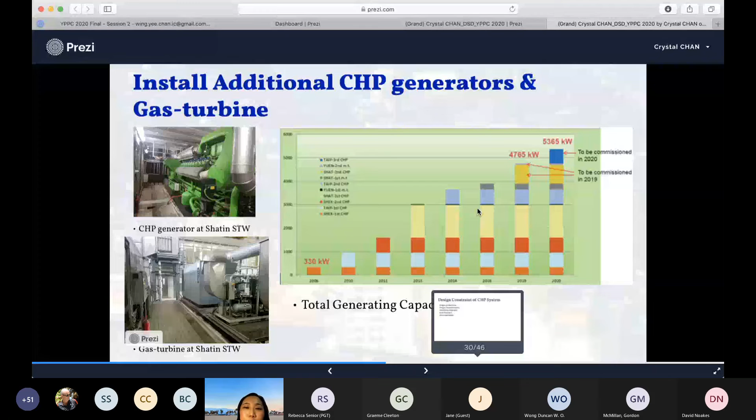So here comes the conclusions. I would like to suggest four development directions. The first one is to boost the biogas production rate. For example, we can introduce co-digestion as well as ultrasonic pretreatment of sludge to increase the biogas production.

The second one: I have successfully proposed a strategic framework for biogas utilization, divided into short-term and long-term, as well as the environmental, economic, and technical aspects.

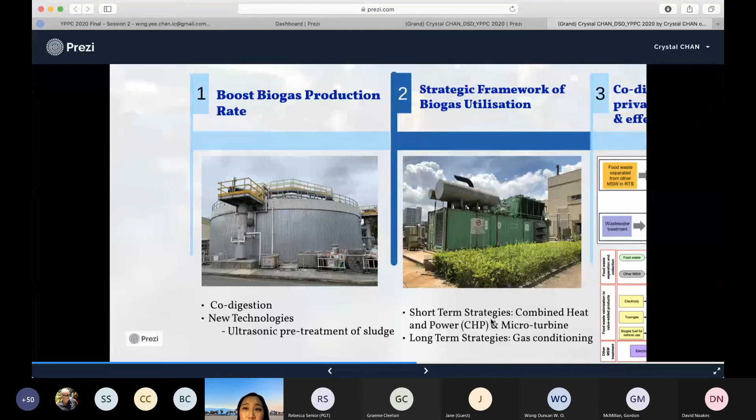The third direction is that co-digestion can cooperate with private sectors efficiently and effectively. Finally, the fourth one is the energy-neutral sewage treatment works. Government, university, private sector, and citizens should join hands and join the energy as well as carbon-neutral world.

So I hope you understand the matter behind anaerobic digestion, and I hope you have had a really good sharing with all of you. That's the end of our presentation. If there are any questions, please feel free to ask.

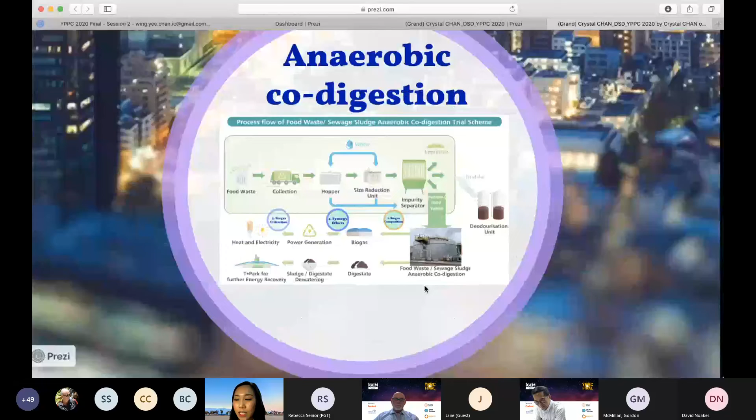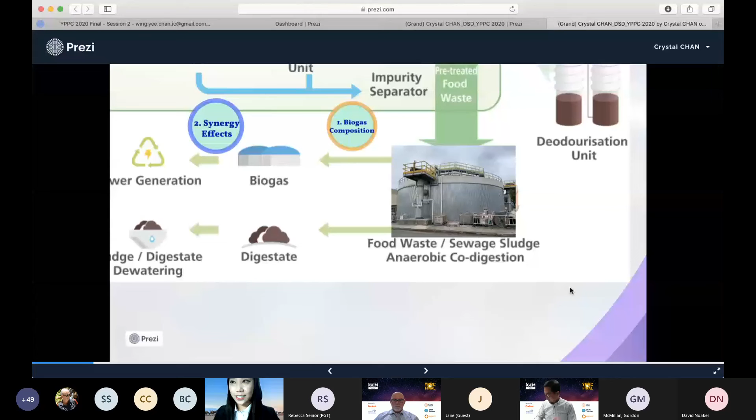So actually, here is the process flow for the food waste as well as sewage treatment works, and how we can encourage citizens to separate the municipal solid waste.

Basically in Hong Kong, there is a separation system for solid waste itself, but for food waste specifically, the Environmental Protection Department, one of the departments of Hong Kong, is going to launch a food waste separation scheme at the end of this year, maybe early next year.

So the government may implement, in the short term, legislations or formulate different strategies to encourage citizens to separate food sources—for example, proteins or carbohydrates, or separating out milk. This is a really important question, because the components of the food waste directly influence the biogas generation.

Most likely, protein would be much more beneficial in generating biogas, because bacteria usually break down the protein itself. So for the government, different kinds of legislation and strategies should be implemented to encourage citizens to have a food waste separation system.

And as citizens, everyone here also shares the corporate social responsibility that we need to protect the environment and save resources for our future generations, not just in the social aspect, but also in the environmental as well as the economic points of view.

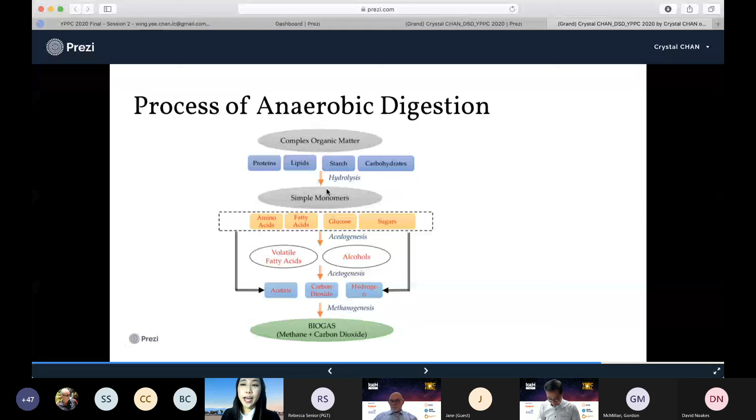Just one more point to come up is that anaerobic digestion is the breakdown of organic materials into biogas. So the components themselves, for example the proteins, starch, or carbohydrates, is really important. Separation of different food waste is really an important first step for every citizen to deal with, as well as sharing corporate responsibility as a CSR citizen. The government, the Drainage Services Department, and citizens share the same responsibility to reach an energy neutral world. Thank you for your questions, Jane.

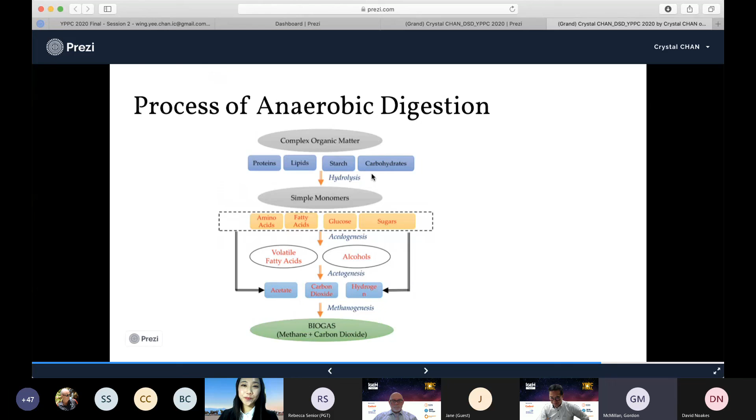Thanks, guys. We just have time for a quick question from Graham. Your part in the process, Crystal - how did you manage prioritization? Because it's an incredible, intense process that you've gone through today. How did you manage prioritization?

Thank you for your question. So indeed, it is really a broad topic to study, which is also very innovative, as well as a sustainable development project in Hong Kong, because Hong Kong as well as the Drainage Services Department haven't applied this kind of technology before.

So how can I prioritize the task? Firstly, I need to understand the biogas compositions, like what kind of methane composition is there. And based on the biogas production rates, I need to strategically identify different kinds of strategies, whether short term or long term, from the perspective of using the triple bottom line - economic, social, as well as environmental - to analyze different approaches. For example, combined heat and power or microturbines for the short-term strategies.

And for the long term, we can use the gas purification process. So after we identify the gas components and the biogas production rate, I need to formulate a strategic framework for biogas utilization. So the strategy for prioritizing the task is using plan, do, check, act. Plan is to have basic research about the biogas compositions, and based on that statistic, I need to formulate and plan a strategic framework to effectively and efficiently enhance biogas utilization.